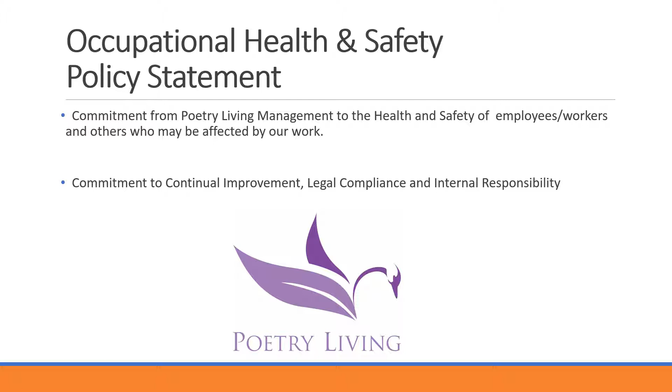Occupational Health and Safety Policy Statement. There's a commitment from Poetry Living Management to the health and safety of employees, workers, and others who may be affected by our work. There's also a firm commitment to continual improvement, legal compliance, and internal responsibility. This is all mentioned in our Occupational Health and Safety Policy Statement.

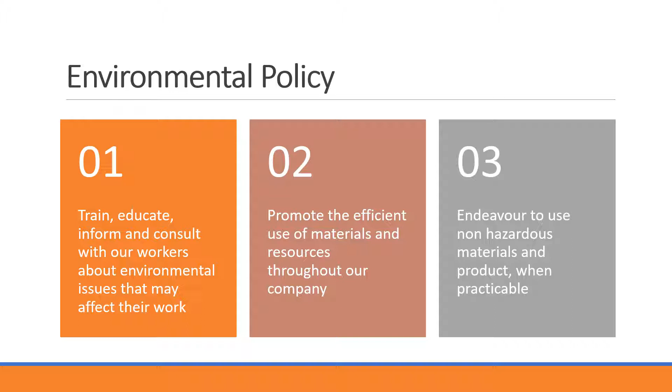Environmental Policy. Poetry Living's goal is to train, educate, inform, and consult with our workers about environmental issues that may affect their work. Two, promote the efficient use of materials and resources throughout our company. Three, endeavor to use non-hazardous materials and products when practicable.

The Green Book. This is the Ontario Occupational Health and Safety Act and regulations for construction projects. The goal of the Green Book is to protect workers against health and safety hazards on the job by setting minimum standards for safe work practices.

Worker expectations, general rules. You are professionals in a work environment. No horseplay, no fighting. Cell phones, headphones, Bluetooth are not permitted while working. Alcohol and drugs: working under the influence or possession of alcohol or drugs are grounds for immediate removal from the work site. Smoking is permitted in designated areas only.

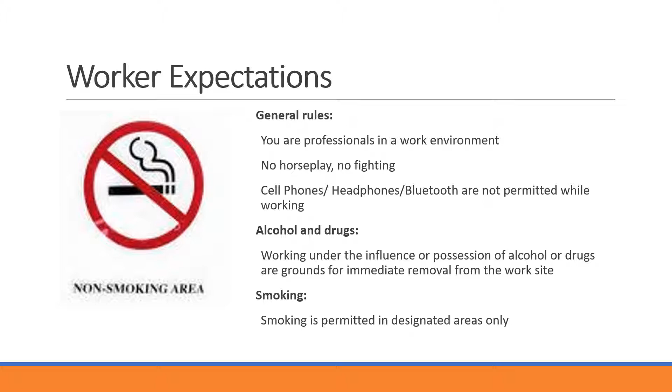Commitment to safety. Health and Safety Board. This is available in the Poetry Living site trailer and Poetry Living head office. Acts and regulations are posted on the Safety Board, available for your review at any time. WHMIS, MSDS, SDS information is available in the site trailer office and Poetry Living head office, also available for your review at any time.

Commitment to safety. Poetry Living has a joint health and safety committee on site if needed, held every 3 months. Minutes and members are posted on the Safety Board, available for your review at any time. Toolbox talks will be held weekly on site. A job hazard analysis, Poetry Living only, will be completed daily to identify hazards and controls.

Joint Health and Safety Committee. Members' names will be posted on the Safety Board. This will include management members and worker members.

Employer responsibilities. The employer must ensure that prescribed protective devices, equipment, and materials are provided, used, and maintained. Ensure that training and competent supervision are provided, and take every precaution reasonable under the circumstances to protect the worker. This is the responsibility of every employer on site.

Supervisor responsibilities. Supervisors must be familiar with legislative requirements, Poetry Living policies, and procedures. Ensure that work is done in a safe manner. Be knowledgeable and advise workers of actual or potential hazards. Provide instructions for the protection of workers. Take every precaution reasonable to protect the worker. Enforce the requirements of the Poetry Living HSC program. Investigate and record HSC deficiencies and corrective actions.

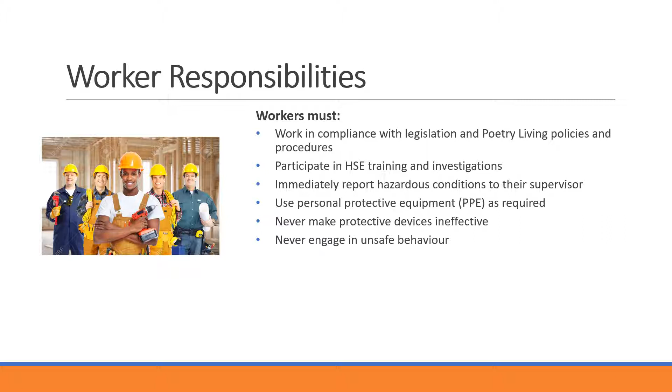Worker responsibility. Workers must work in compliance with legislation and Poetry Living policies and procedures, participate in HSE training and investigations, immediately report hazardous conditions to their supervisor, use personal protective equipment as required, never make protective devices ineffective, and never engage in unsafe behavior.

Personal protective equipment. Types of PPE: Head protection, mandatory on site at all times. Foot protection, mandatory on site at all times. Eye protection, mandatory on site at all times for only Poetry Living personnel. High visibility clothing, mandatory on site at all times. Additional PPE includes hearing protection and respiratory protection, as needed.

Other PPE can be task specific. Gloves: work gloves, cotton knits, yellow or green PVC, etc. Clothing: no shorts or cutoffs, no tank tops, no muscle shirts. Keep clothing in good condition.

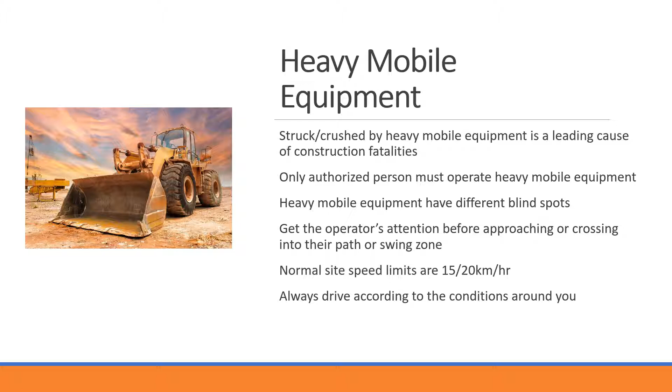Heavy mobile equipment. Being struck or crushed by heavy mobile equipment is a leading cause of construction fatalities. Only an authorized person must operate heavy mobile equipment. Heavy mobile equipment have different blind spots. Get the operator's attention before approaching or crossing into their path or swing zone. Normal site speed limits are 15-20 kilometers an hour. Always drive according to the conditions around you.

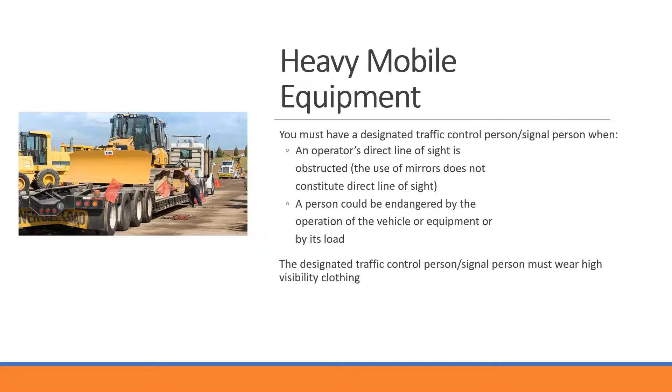Heavy mobile equipment. You must have a designated traffic control person, or signal person, when an operator's direct line of sight is obstructed. The use of mirrors does not constitute direct line of sight. A person could be endangered by the operation of the vehicle or equipment or by its load. The designated traffic control person, signal person, must wear high visibility clothing.

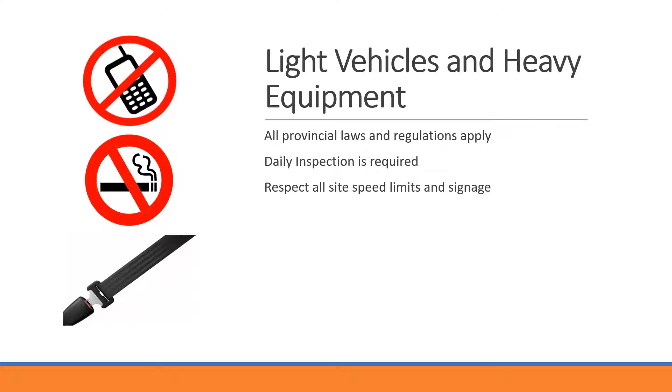Light vehicles and heavy equipment: all provincial laws and regulations apply. Daily inspection is required. Respect all site speed limits and signage.

Fall protection must be used when working at a height of 3 meters or more, or from a lesser height involving an unusual risk of injury, at a height of more than 4 feet if the work area is used as a path for a wheelbarrow or similar equipment, at any height when working over operating machinery, over water or another liquid, over hazardous substances or objects, or by an opening in a work surface.

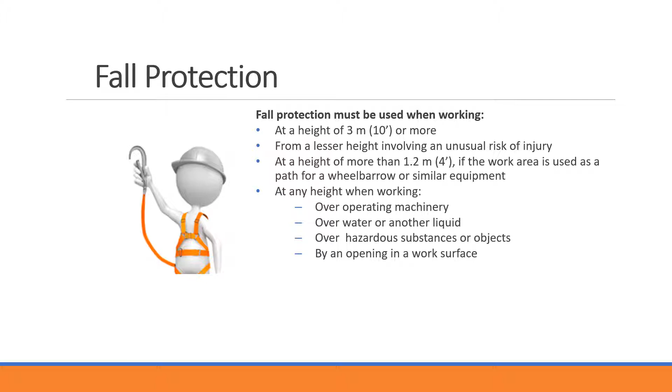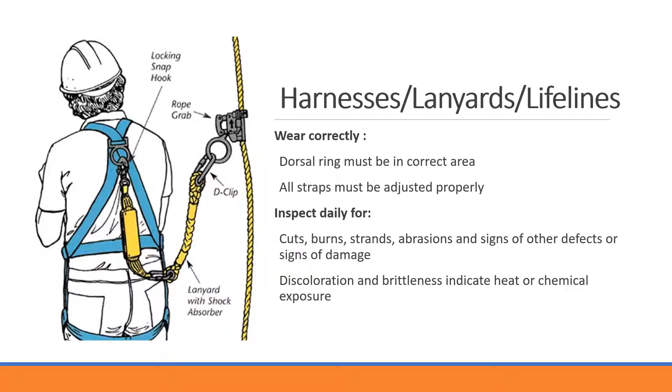Harnesses, lanyards, and lifelines: wear correctly. The dorsal ring must be in the correct area, and all straps must be adjusted properly. Inspect daily for cuts, burns, strands, abrasions, and other signs of defects or damage. Discoloration and brittleness indicate heat or chemical exposure.

Fall prevention includes proper use of worksite access such as ladders and scaffolds, protective covers over floor and roof openings, warning barriers and bump lines, guardrail systems, and travel restraint systems.

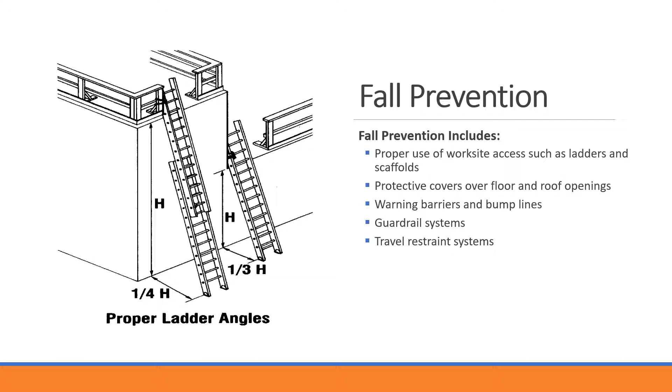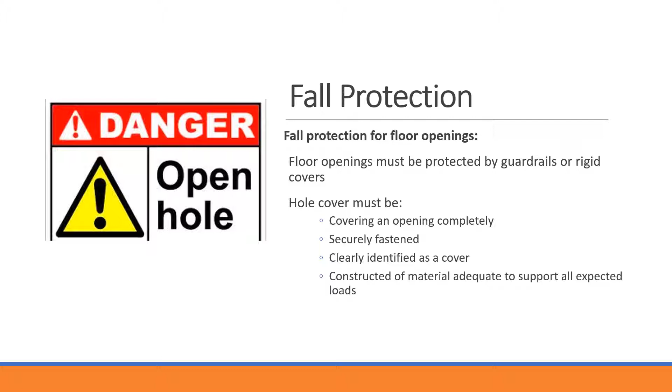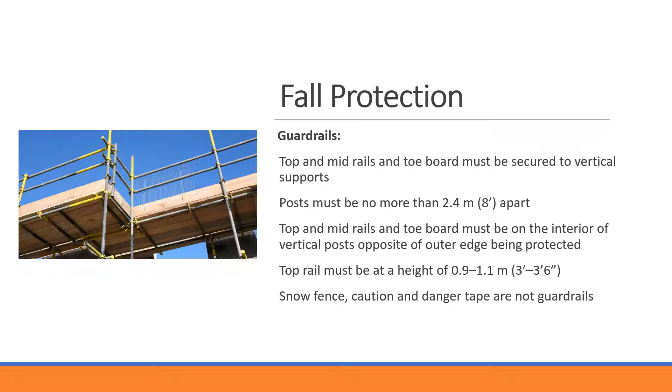Fall protection guardrails: top and mid rails and toe board must be secured to vertical supports. Posts must be no more than 2.4 meters apart. Top and mid rails and toe board must be on the interior of vertical posts, opposite the outer edge being protected. Top rail must be at a height of 0.9 to 1.1 meters. Snow fence, caution, and danger tape are not guardrails. Examples of guardrails are shown.

Safe access and egress: workers should always use stairs or a ladder to get up or down from elevated heights. Both hands must be free for grip when going up or down a ladder. Always use 3-point contact. A hand line shall be installed to lower and raise all materials.

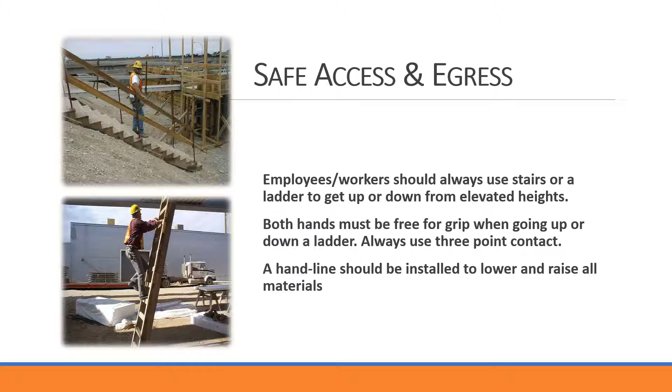Safe lifting: lift correctly using your legs, not your back. Get help on heavy or awkward loads. Stay close to the load you are trying to lift. Avoid unnecessary bending and twisting, as this places the greatest amount of stress on your back.

Tools and equipment: safety features are not to be removed or made inoperable. Ensure tools are kept in good working condition. Tag damaged tools and immediately remove them from service. Frequently check power cords for their condition.

Use of compressed air: compressed air is not to be used to clean clothing. Secondary secure whip checks must be in place. Safeguards: no employee or worker shall remove, impair, or render ineffective the safeguards provided for the protection of workers.

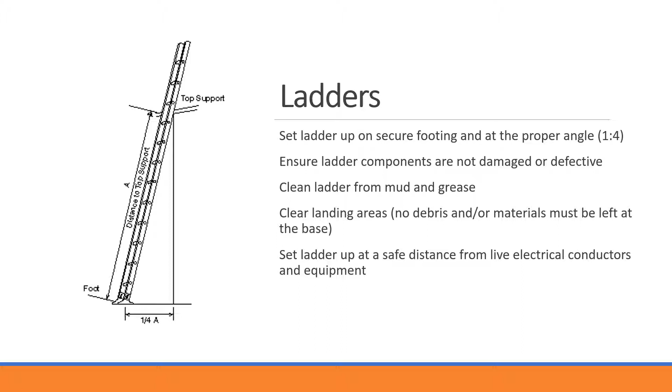Ladders: set the ladder up on secure footing and at the proper angle, 1 foot horizontally for every 4 feet vertically. Ensure ladder components are not damaged or defective, and clean the ladder from mud and grease. Clear landing areas; no debris or materials must be left at the base. Set the ladder up at a safe distance from live electrical conductors and equipment.

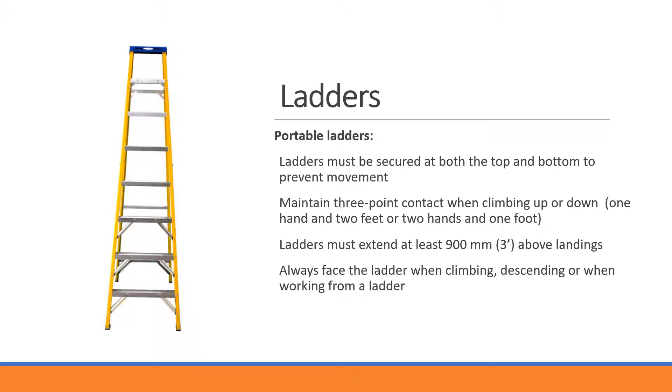Portable ladders must be secured at both the top and bottom to prevent movement. Maintain 3-point contact when climbing up or down, using 1 hand and 2 feet or 2 hands and 1 foot. Ladders must extend at least 3 feet above landings. Always face the ladder when climbing, descending, or when working from it.

Step ladders: make sure spreaders are pushed down and locked. Never stand on the platform, the top step, or the pail shelf. Never use step ladders for temporary bracing or shoring.

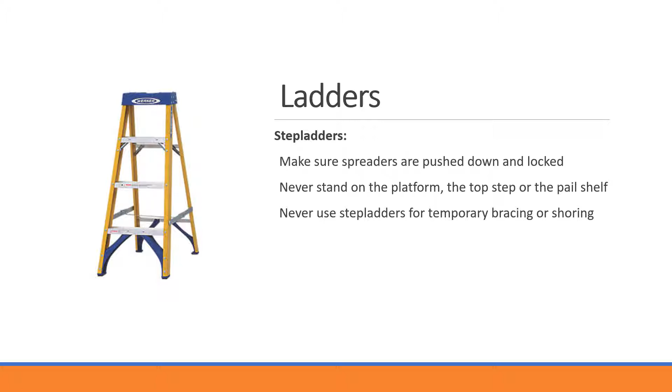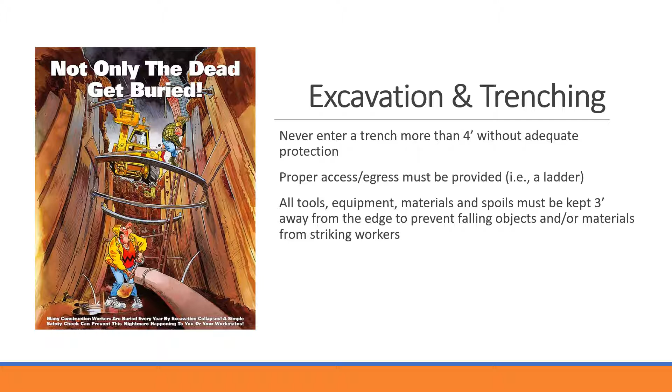Excavation and trenching: never enter a trench more than 4 feet deep without adequate protection. Proper access and egress must be provided, for example a ladder. All tools, equipment, materials, and spoils must be kept 3 feet away from the edge to prevent falling objects or materials from striking workers.

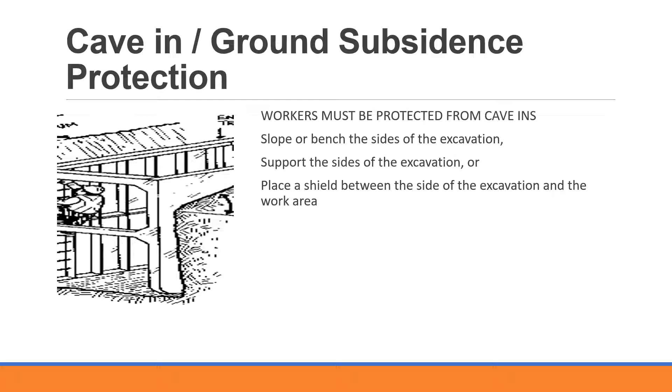Cave-in and ground subsidence protection: workers must be protected from cave-ins by sloping or benching the sides of the excavation, supporting the sides of the excavation, or placing a shield between the side of the excavation and the work area.

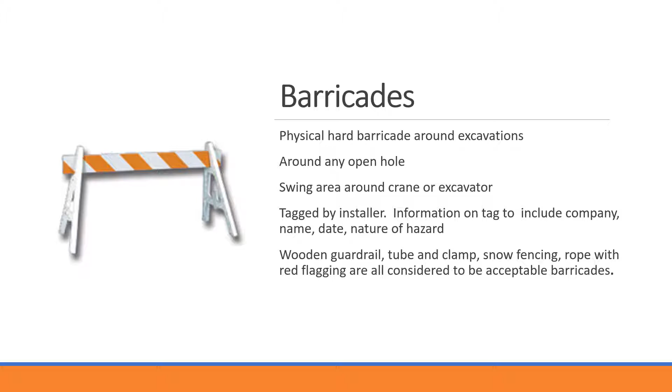Barricades. Physical hard barricades around excavations can be around any open hole, or the swing area around a crane or excavator, and must be tagged by the installer, with information on the tag to include company name, date, and nature of hazard. Wooden guardrail, tube and clamp, snow fencing, and rope with red flagging are all considered acceptable barricades.

Housekeeping. Clean up spilled materials immediately to prevent incidents. Use proper waste management bins for all hazardous waste. Clean up waste materials on a regular basis throughout the day to prevent making a hazard. Use proper lighting at all times, don't work in the dark, and keep equipment clean and tidy.

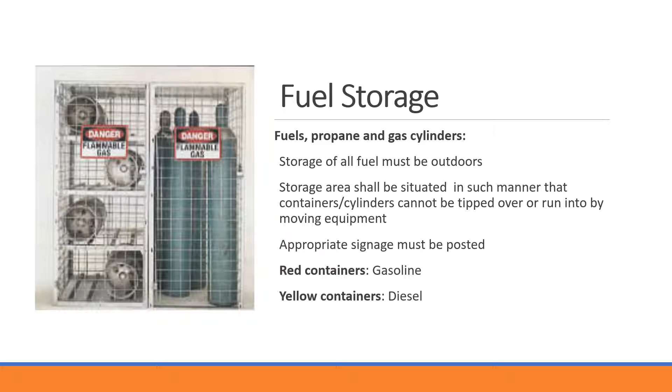Fuel storage: fuels, propane, and gas cylinders. Storage of all fuel must be outdoors, situated so containers and cylinders cannot be tipped over or run into by moving equipment. Appropriate signage must be posted. Red containers are for gasoline, yellow containers are for diesel.

Fuel storage: a fire extinguisher must be located next to fuel storage, and workers must be aware of the fire extinguisher location.

In the event of a fire, remain calm, alert others, and pull the alarm. Operating a fire extinguisher uses the PASS method: pull the pin on the handle, aim the hose at the base of the flames, squeeze the handle to release the agent, and sweep the hose from side to side. Only attempt to extinguish a fire if you feel it is safe to do so.

Confined space. A confined space is defined as a place that is partially or fully enclosed, not designed or constructed for continuous human occupancy, and where atmospheric hazards may occur because of its construction, location, or content, or the work done in it. All three criteria must be met before a space is defined as a confined space.

Examples of confined spaces include vaults, tanks, pits, trenches, manholes, and silos. Important note: workers must be fully trained and certified to work in confined spaces. Any workers not holding the correct training must not enter the confined space.

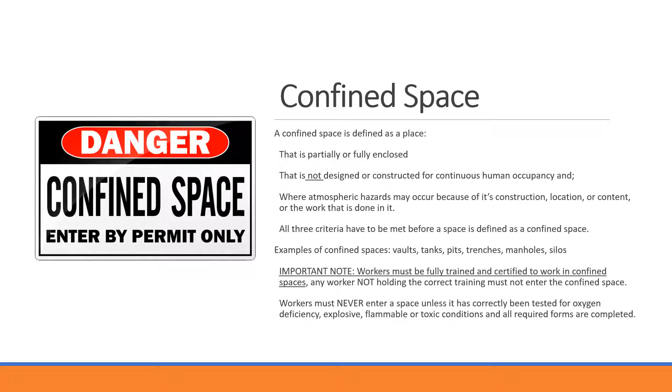Workers must never enter a space unless it has been correctly tested for oxygen deficiency, explosive, flammable, or toxic conditions, and all required documentation is completed.

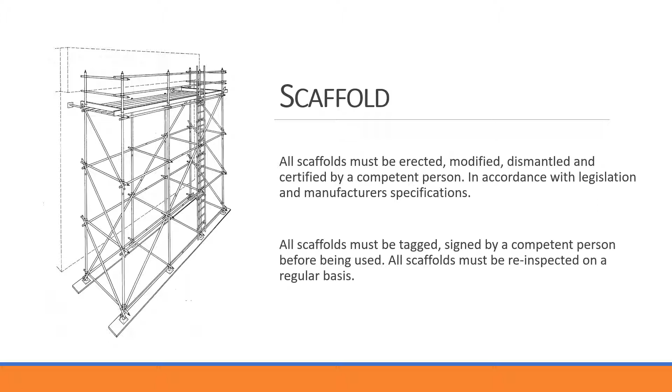Scaffold. All scaffolds must be erected, modified, dismantled, and certified by a competent person, in accordance with legislation and manufacturer specifications. All scaffolds must be tagged and signed by a competent person before being used, and re-inspected on a regular basis.

Elevated work platforms. Workers must be tied off to designated anchor points at all times while in the platform. Never leave the platform while elevated. Lower the work platform before moving.

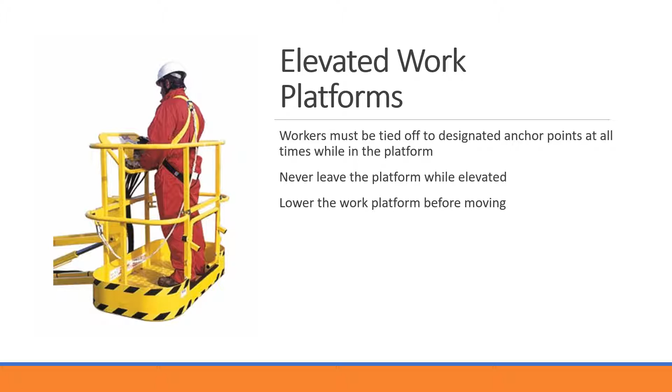Training. Workers and employees are required to make available proof of training from a recognized training provider at orientation, or prior to engaging in any activity or task, under expectation of the Occupational Health and Safety Act and/or regulations for construction projects.

Emergency muster meeting points. In case of an emergency, all workers are to evacuate to the emergency muster points for a head count by the supervisor.

Emergency response procedures, with regards to the air horn blast. Man down: signal is 1 long blast of the air horn, 5-second delay, repeat. Fire: signal is 2 consecutive blasts, 5-second delay, repeat. Evacuation: signal is 3 consecutive blasts, 5-second delay, repeat. Assembly area is at the muster point. All personnel on site must sign in and out for head count purposes.

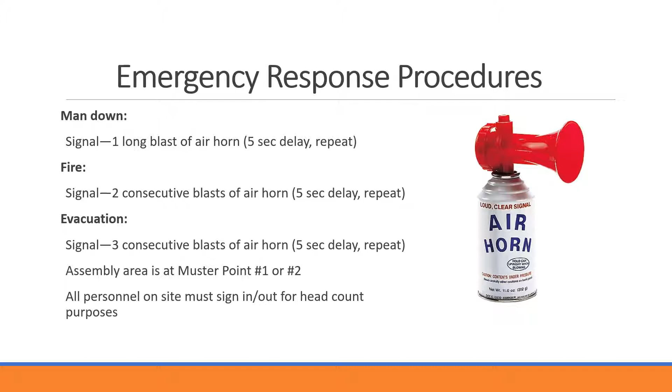Emergency medical first aid: remain calm. Immediately advise your supervisor and the person designated for first aid. Protect the victim; do not touch the victim unless you are specifically trained to do so. Call 911 and answer questions while remaining on the line.

Workers' health information. The first aid kit is located in the site trailer first aid room. Names of first aid attendants are posted on the main safety board and at emergency stations.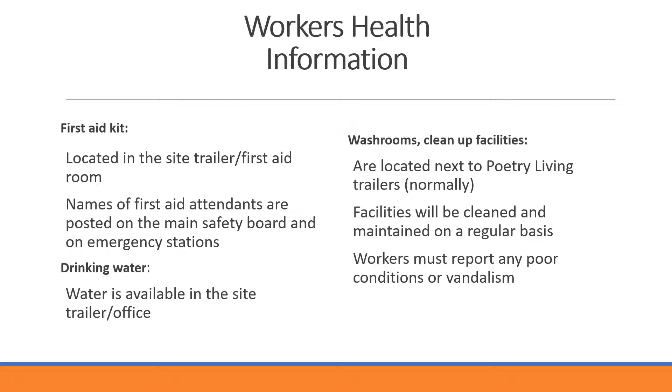Drinking water is available in the site trailer office. Washrooms and cleanup facilities are located next to the Poetry Living trailers normally, and will be cleaned and maintained on a regular basis. Workers must report any poor conditions or vandalism.

Disciplinary action occurs when a worker commits a safety violation on site. These are the 3 steps we follow: first, a verbal warning to the worker; second, a written warning to the worker; and third, suspension or dismissal for the worker.

Incident, near miss reporting, and investigation. All work-related incidents, exposures, near misses, and equipment damage must be reported immediately to a supervisor. The supervisor is to contact the safety department to complete an incident report.

Incident reporting and WSIB. Poetry Living has a comprehensive modified duty work program in which workers are required to participate. You are important to us. If you sustain an injury, we will work together to get you back 100% as soon as possible. This is only for Poetry Living personnel.

Workplace harassment. Mutual respect, cooperation, and understanding of all people in the workplace is expected from all employees and workers. Workplace harassment is not tolerated on site.

Workplace violence is any act or incident whereby an employee or worker is intimidated, threatened, abused, or assaulted in circumstances relating to their work. Workplace violence is not tolerated on site.

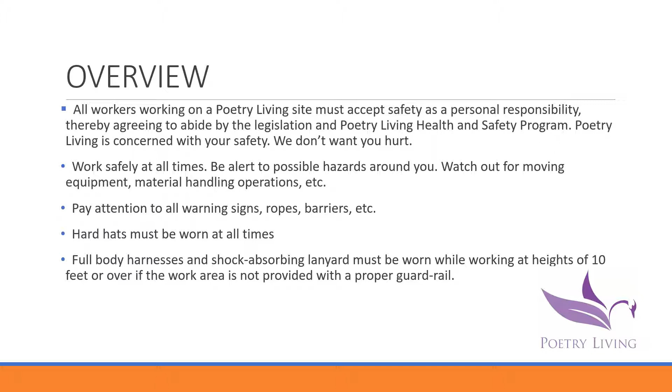A face shield and safety glasses are required during grinding and cutting operations. Proper safety footwear shall be worn by all workers.

Face masks or other respiratory equipment must be worn where you are exposed to injury from noxious gases, fumes, or dust. Note, must be fit tested and clean shaven.

Work gloves will be worn where there is a danger of hand injury from splinters, blows, pinching, cuts, abrasions, burns, or skin rashes. Operators require training in the safe operation of forklifts and other heavy equipment.

All environmental spills or any environmental release must be reported to your supervisor. Proper clothing is required to be worn that protects against physical agents. Examples include heat and cold.

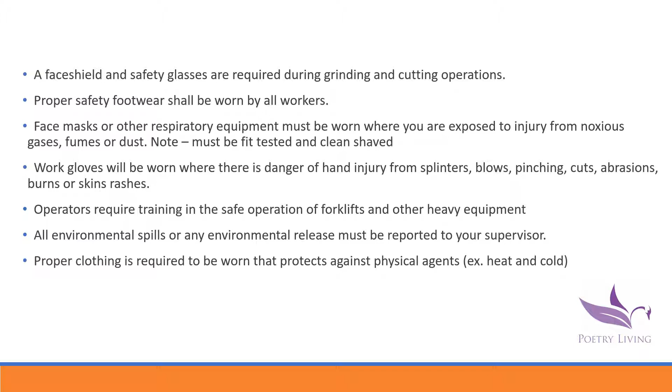Before starting a job, check your tools for defects and check the area you will be working in. Report any unsafe conditions that you may notice anywhere at the workplace. Don't take shortcuts, use the stairs, ladders, or ramps provided.

Be sure of your footing. Check all ladders and scaffolds to assure that they are safe for use. When working from a step ladder, stand no higher than the second step from the top.

Report all incidents to your supervisor no matter how small. Maintain an orderly work area with good housekeeping practices.

Use only approved solvents for cleaning fluids. Store and transport gasoline, thinners, oils, etc. in safety containers properly identified and in compliance with WHMIS requirements.

Control your welding and cutting operations at all times to protect yourself, employees, material, and equipment. Use welding screens and other protective measures.

Open fires are prohibited. Poetry Living is committed to the concept that all workers have the right to participate in all matters relating to health and safety, know about the issues relating to health and safety, and have the right to refuse any unsafe work.

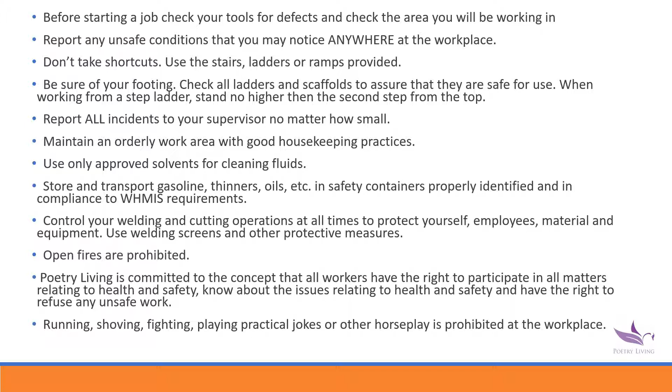Running, shoving, fighting, playing practical jokes, or other horseplay is prohibited at the workplace. Firearms or dangerous weapons are not permitted at the workplace.

Work areas are to be inspected at the end of the shift to ensure that machines are shut off and that no fires or sources of fire are left. All steam, air, water, and electric power shall be shut off unless otherwise instructed.

All procedures controlling smoking areas, vehicles, eating areas, and flame permits shall be followed. All protruding objects must be bent down, pulled, or removed.

Fire extinguishers will be placed in areas subject to fires. All fire control equipment must be well maintained and readily available for use. All washrooms, toilets, tool cribs, lunch areas, and shops must be maintained in a safe, clean, and sanitary condition.

Workers working over others must advise those below of hazards and take all precautions to prevent accidents. All workers shall use personal protective equipment as required.

Follow all confined space requirements, including entry permits. Ask your supervisor for direction. All requirements for lockouts and tags shall be followed.

Possession, use of, or trafficking of intoxicants and/or non-medical prescribed narcotics or drugs are strictly prohibited.